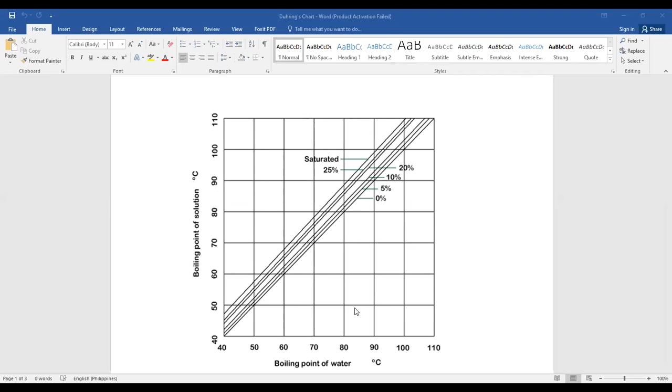Yes, miss. Okay, so I'll be showing to you 3 different Dühring charts. A Dühring chart allows you to determine the boiling point of the solution based on the saturation temperature of that same solution and the amount of solids that it contains. So the saturation temperature is the horizontal axis value that you are using here.

So you see boiling point of water, meaning if it's just pure water, it's going to boil at 100 degrees Celsius if it does not have any solid content. Now, if it is having solid content, that particular solid content are these lines you are seeing here. So you have 0%, 5%, 10%, 20, 25, and this one is already the saturated line.

So for example, if your solution at the indicated pressure has a saturation boiling temperature of 90 as an example, and it has a solid content, for example, of 20%, what you do is from the 90 that you have here, you go up until you reach the 20% line. And this is this line. And then you go left and read the corresponding boiling point of the solution.

If you notice, class, wait, somebody wants to, okay.

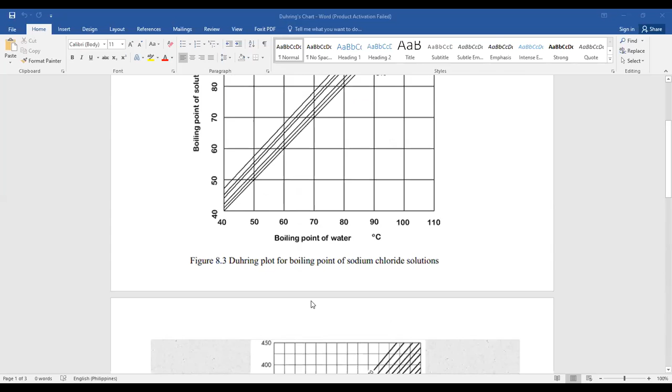So what you're reading here is boiling point rise, not boiling point of the solution. So for you to know the elevated boiling point of your solution, you need to add this value here to the saturation temperature. That would be now the boiling point of your solution. You can use this particular part here for your weight percent solids, or you can also use this part, whichever you are comfortable in using.

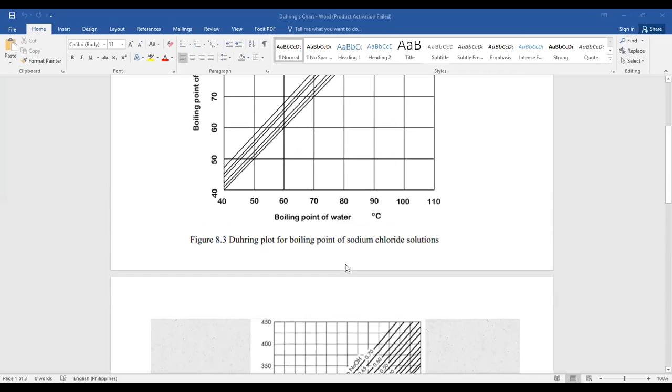This is the exact thing which I simply magnified in here, copied for you to see. So you will use these charts in solving problems that require you to consider the boiling point rise of the solution. Now, I'd like to go to a different chart so that later on you will simply have to get the values from the chart. What chart do you have here? This is the chart that I'm referring to as the concentration enthalpy chart. However, class, you only have one chart for this, unless, let's say in the board exam, they will be giving you one special chart for a particular system that is different than NaOH.

Now, what do you have in here? So in the horizontal axis, you see the weight fraction sodium hydroxide. So it's given. Weight fraction of sodium hydroxide in the feed is, say, 20%. And the feed, let's say, is 10 degrees Celsius. So it's 10 degrees Celsius. How do you get its enthalpy? You look for that curve on the 10 degrees Celsius and then read the enthalpy.

If it's English, you read here. If it is SI rather, you read here. If it is English, you read on the other side, because your unit here is English. In here you have SI. You get it? So you use the percentage of the solid.

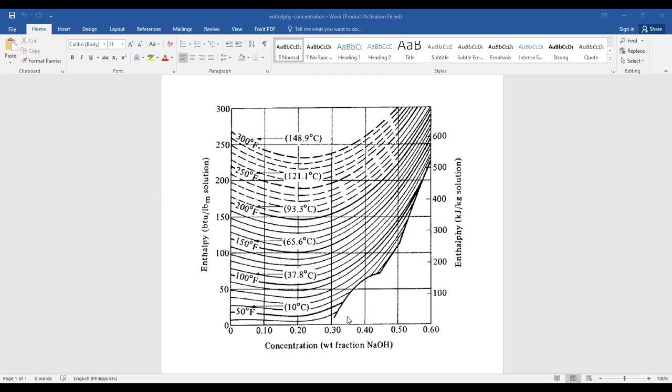This is where you get the enthalpy values of your aqueous solution of NaOH given its percentage by weight solid present. That's it. Okay, so I'll go to my problem. Stop share, share again. I go to that problem.

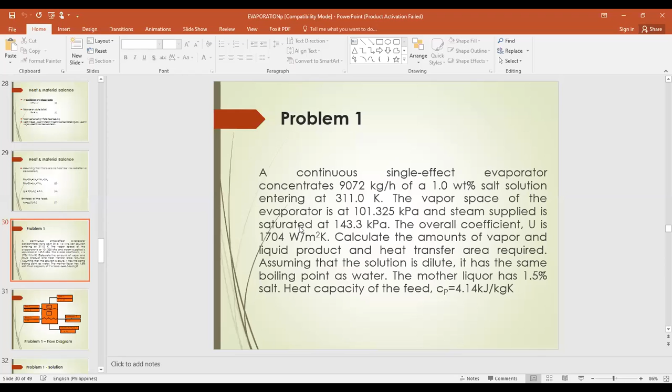Okay. We are now on problem number 1. A single effect evaporator has to concentrate 9,072 kg per hour of a 1% by weight salt solution entering at 311 Kelvin. Before I go any further, notice that the weight percent of the salt in the original feed is only 1%.

And as such, even if the problem does not say it, it's okay to neglect BPR; we say boiling point elevation or boiling point rise is negligible because your solution is already dilute. When can we say that your solution is dilute? When its percentage composition by weight is less than 10%. So you are allowed to assume that there is no BPR.

So in this first statement, you have the amount of the feed, its temperature, and its XF, its weight fraction. We go to the second statement. The vapor space of the evaporator is operating at this pressure. So you're already given the operating pressure of your evaporator. As to the steam, it is saturated at this pressure, so not operating pressure, but rather the pressure of your steam.

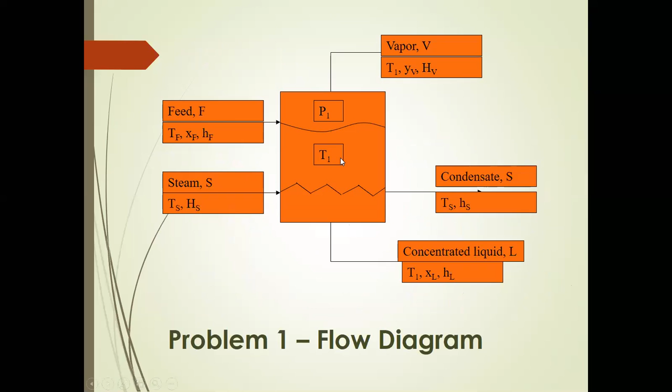So if you have placed in there everything, then you're good to go for the next requirement. Okay? We will go to the solution because I have already enumerated the unknowns. You have the V, the L, and the area. So it's very simple in terms of material balance as to the procedure in finding the L and V. So you get the overall material balance. Both L and V are unknown. So this is your equation 1.

If you do solid balance, you just substitute. So substitute the percentage by weight mass of your solids for the liquor and the feed. And then you will get the liquor. Then you go back to the first, you will get the vapor. So that's already it. Most of the time, these two are determined based only on material balance. It's normally the S and the Q that require you to make an energy balance. So we will do that.

Now, since the property of the solution is comparable to that of water, then we will say that at normal atmospheric pressure, your water will boil at 100 degrees Celsius. In Kelvin, that would be 373.15. Now, this problem, class, I will really emphasize this. This problem solution is only applicable to the scenario similar to this kind.

So the scenario is you don't have any boiling point rise, and that the behavior of your solution is comparable to that of pure water. That's the scenario, okay? So the solution that you're seeing here is not applicable for those that have boiling point rise. Now, why am I trying to emphasize this?

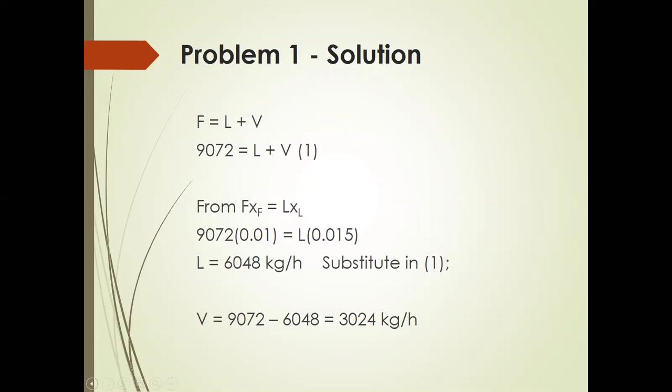Because if you go back to your energy balance, the energy balance equation will need the enthalpy of the feed, the enthalpy of the liquid, and the enthalpy of the vapor. Saturated liquid and saturated vapor enthalpies based on the operating pressure or based on the saturation temperature of the solution inside the evaporator. I'm referring to these two. Okay? So this is your equation.

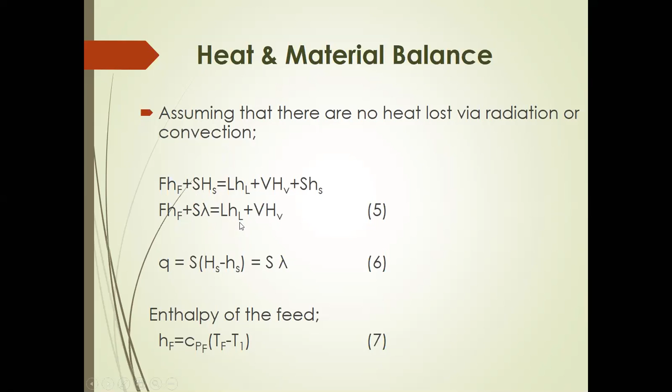As for steam, it has its own pressure or temperature where you can determine the lambda. So the concern is this, the HL and the HV. So I'd like to go back to our problem. Now, we will find the solution's latent heat HV from the steam tables, and the value of which is 2,257. Take note.

And it's not HV only, but rather in this problem, I want a different color, it's latent heat. What does that mean? When we speak of latent heat, it's already considering both the saturated vapor enthalpy and the saturated liquid enthalpy. You may wonder, why is that? It's supposed to be only saturated vapor enthalpy. Allow me to continue so that you will get to see later on that we are allowed to do that in this case.

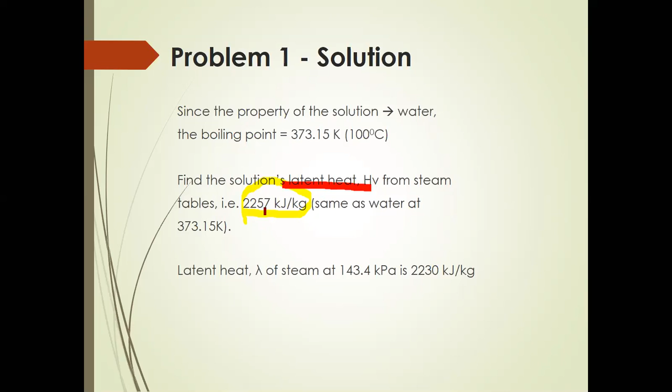So let's say your HV will be not just the saturated vapor enthalpy, but rather the latent heat of your solution, which is 2,257. It's based on this particular temperature of your water. As for steam, there's no worry about this because it stands alone. It's not interfering with the values that we are getting for our solution. It has its own pressure to be used as a basis in determining its lambda. So that's for the steam.

So we will check that for the steam, and we will check one for our HV, which is not just Hg in your thermo, but rather HV, the solution's latent heat. So I have already the enthalpies of this and the lambda for the steam. Then I need to determine that of the feed. Take note. If you remember the formula I've shown you a while ago, the enthalpy is computed based on the specific heat, the temperature of that particular stream, whether it's feed or liquor, and some base temperature.

And I said the base temperature, class, is 0 if it's degrees Celsius, and it is 32 if it's degrees Fahrenheit, depending on the units that are provided in the problem. What have you noticed about this? We're not using 0, right? Because as you can see here, the temperature that is being subtracted is actually the saturation temperature based on the operating pressure of your column, right?

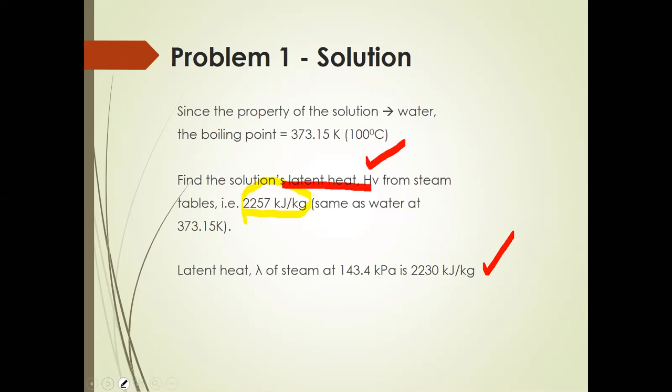If you will think, how can it be that its energy content is negative? It is negative because we solve it differently here. We use the solution's latent heat, not just its saturated vapor enthalpy. Okay, so we use this, and this is it.

Now you have the enthalpy of the feed. You have the lambda of the steam. So this is the enthalpy of the feed, the lambda of the steam, and this is the solution's latent heat of vaporization. What's so peculiar about this equation if this one is for the feed, this one is for steam, this one is for liquor, and this one is for V? What have you noticed?

Have you noticed? Aren't you wondering why this is 0? This is 0. You are to make this 0 because of the two reasons you did here. Number one, it's because you use the boiling point temperature of your solution in determining the enthalpy of the feed. And the primary reason is you are using the latent heat of vaporization of your solution.

In the original formula, this should have been HL, the saturated liquid enthalpy, and this should have been only Hg for the vapor. But since you made this the latent heat of the solution, this should be 0, and this should not be 0, but this should be the boiling point of your solution at saturation.

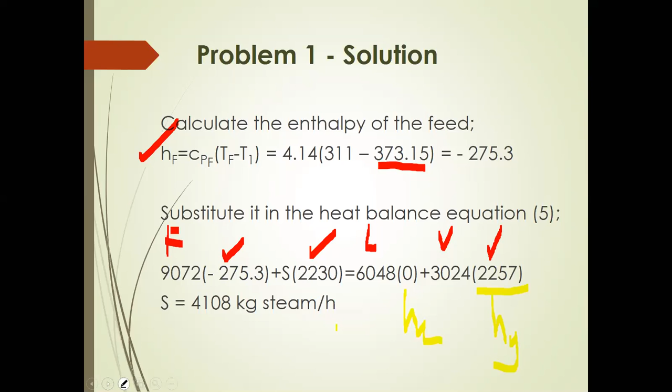Since I have only 10 minutes left, so let's see. Now, I'll go to the second problem. By the way, sorry, wala pa class.

Sorry. So now we have determined the S. You can now get the Q, which is S lambda. So you just substitute, this is your value, but your unit is kilojoule per hour. You have to make it watt so that it will agree with the unit of your overall heat transfer coefficient U. So convert it to watt; I think you know full well your conversion of units.

Then you equate this value for the Q with this one, with the goal of determining the area in square meters. So this is your area now for your evaporator. You have answered the area, the V, and the L. Now, do you have any question before I go to the second problem? It's very short actually.

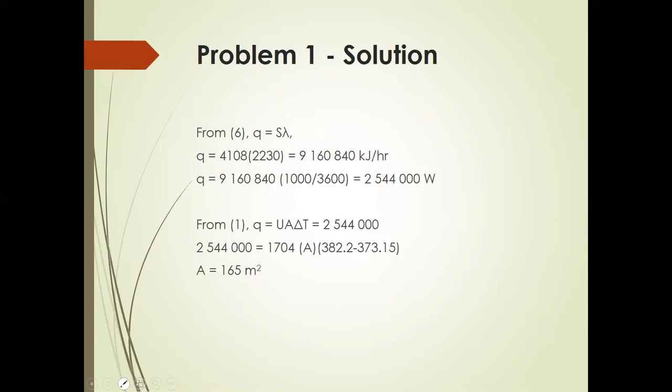No question? Okay. So what you'll do actually is this. Later on, you have your dry lab. You will work on this as a group. You have grouped yourselves already, you have your members. You will work on this and submit it tonight because that's your requirement for your dry lab. It's equivalent to what we have done in the first problem. So you will do it later.

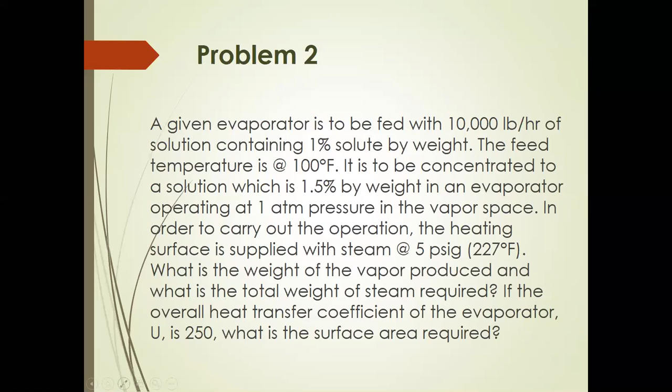Now, the third problem will be determining the BPR for NaOH, which I think will be done in 5 minutes. So the pressure in your evaporator is given. It's 25.6 kilopascal. And you are given a solution of 25% NaOH. Now, you are to determine the BPR of the solution over that of water at the same pressure.

So a simple question of determining the BPR for a solution that is not anymore dilute because its concentration is 25% NaOH, and your evaporator is at this pressure. If I ask you, what will you use here to find the BPR? Of course, you will use this one because it's needed in the Dühring chart, the X, the percentage by mass. Then what is it that you still need to determine so that you can use it together with this X to get the BPR? You need the what?

If you recall the illustration, you will be needing the percentage of the solid and the saturation temperature. The saturation temperature is based on the operating pressure of your column. So in this case, I don't have the ready-made solution of this. You will have to get, based on this pressure, the T sub S. Where will you get it? From the steam tables. So you should have your steam tables. So either you use the steam tables at the appendices at the back of your books, or you use the steam table from your handbook.

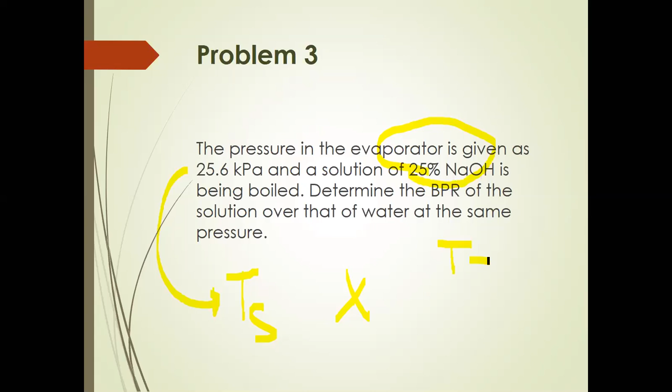You need this T sub S together with this X, this one. That's your X. So that you can go back to the chart that I have shown you a while ago and get the BPR. You cannot get the BPR from the chart, but what you will be getting in the chart is the boiling point of the solution. The solution boiling point, that would be T, and you will subtract the T sub S from that to get the BPR. So what you'll be getting is T from that graph, and then subtract the T sub S, which you based from the pressure, and then that's it. You have already the BPR.

Okay? I think it's very easy. Get the T sub S based on this pressure. Using the T sub S together with this percentage of solids, which is X, you go to the chart that I have shown to you for NaOH. Read the T. That's the boiling point of the solution. In our illustration, it's T sub 1. You subtract the T sub S from that. That's the primary requirement of the problem, which is the BPR. Do you get it? Third year?

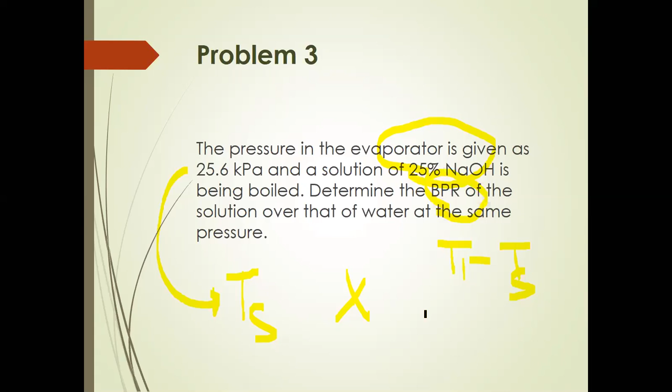So, let's say, for example, I'll go to the chart. I will stop share. Share screen again. Where is that chart? Like this one. Okay. You will look for NaOH. Where is NaOH? There is your NaOH. What you do, you first need the saturation temperature. You convert it to Fahrenheit if it's in Celsius.

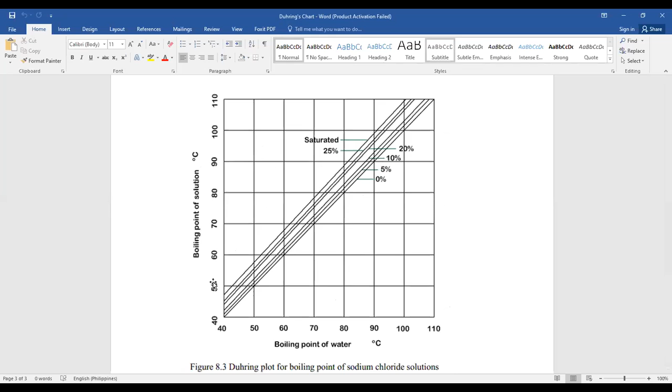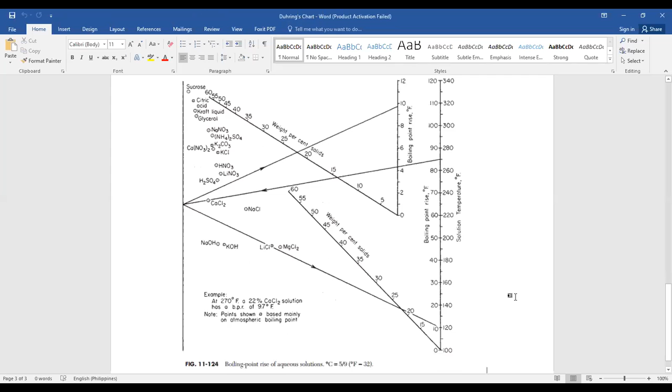Do you get it? Let's say 200. 200, you go here. Then look for the percentage by weight solid of 25. Go down here, until it hits this line. Then you go down there. That's your boiling point rise, whatever you read there. Okay? What is good about this, it's already boiling point rise.